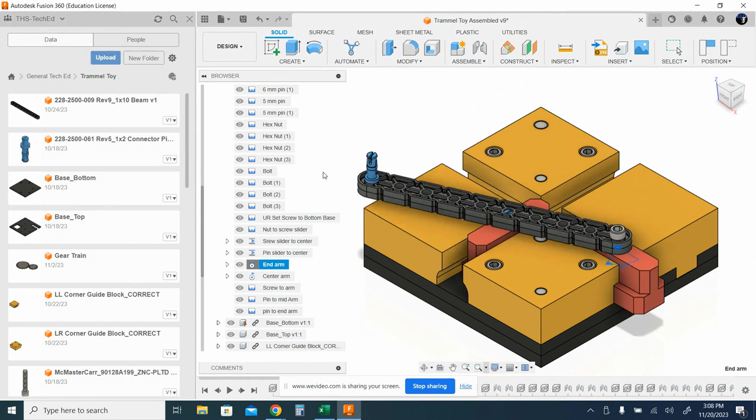All right, hello IED. In this two videos, what we're going to be doing is creating the Archimedes Trammel toy. I'm giving you all the pieces, and you should have it downloaded here. But our end result is going to look something like this. This is the Archimedes Do Nothing, or Trammel toy.

So let's go ahead and get started on this. First thing we're going to do in this first video is bring parts in. This whole project is about doing joints: as-built joints, creating regular joints, and creating motion joints. We're doing all three in this project. So with that said, let's create a new file.

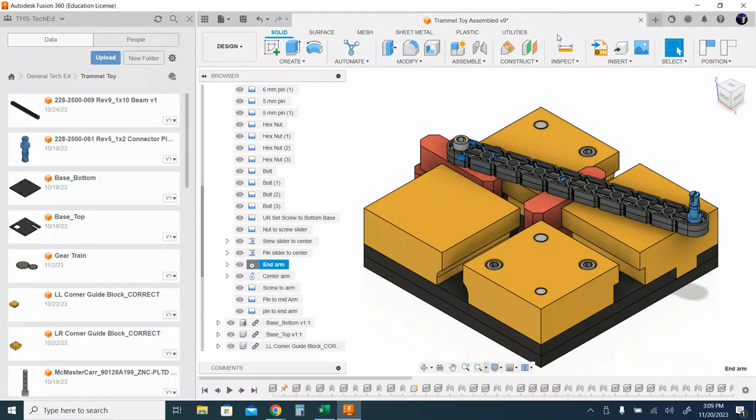First thing we're going to do is save this. I'm going to call this Trammel Toy Video. That'll work. It's going to save it. Upload in progress, thank you. And it looks like we're saving here.

First piece we're going to bring in on the left here is the base bottom. It's going to drop it right in place for me. I'm just going to say okay, I'm happy with its location since it's just somewhere in space. I'm going to right click on base bottom and come up to ground. What this does is lock this piece in place—it cannot move. If I unground it, or take this little pin out, then it will be movable again.

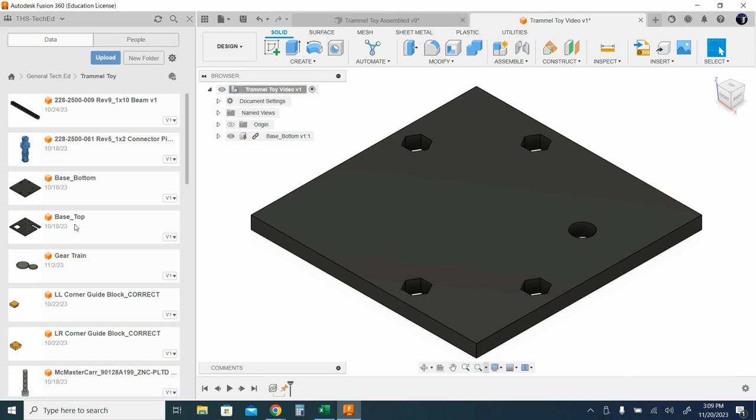With that said, let's go ahead and bring in the base top. When they built this thing, they built these pieces right where they needed to be, which is really nice, because now I don't have to move it. I can say okay, and this piece is sitting here. If I wanted to, I can move this thing around. I'm going to Control Z that, put it back in place, because I want to lock this thing right where it sits.

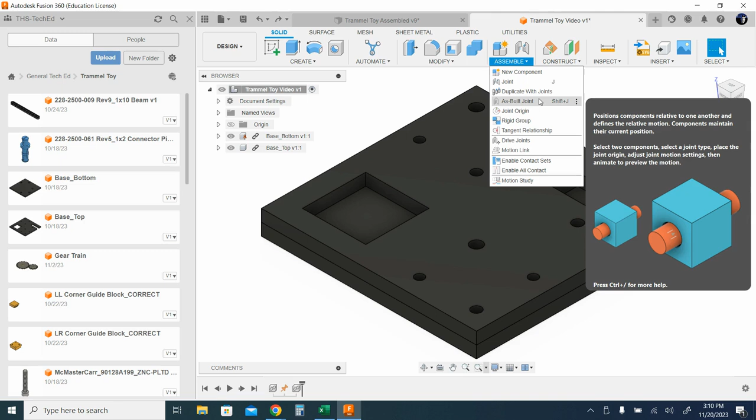To do that, under Assemble, you want to do an as-built joint, or Shift J. It brings up the as-built joint window, and I'm going to select my two components that are sitting exactly how I want them. I'm going to leave my motion as rigid. If you want to see something cool, hit the play button and bounce it around—kind of fun—and say okay.

At this point, they are now jointed together. The bottom base is grounded, so it cannot move. The top base cannot move because it has that rigid joint to the bottom base, which cannot move. So I'm good to go there.

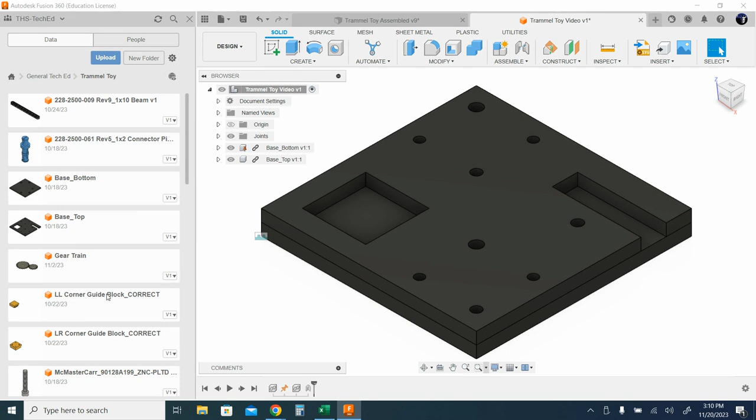Next thing we're going to do is bring in the corners. I have a lower left corner. I'm just going to bring them all in at the moment. Okay, I have a lower right. Scroll down to the bottom—I have an upper left and an upper right. Upper left, okay, and upper right. So those are the four corners that are in there.

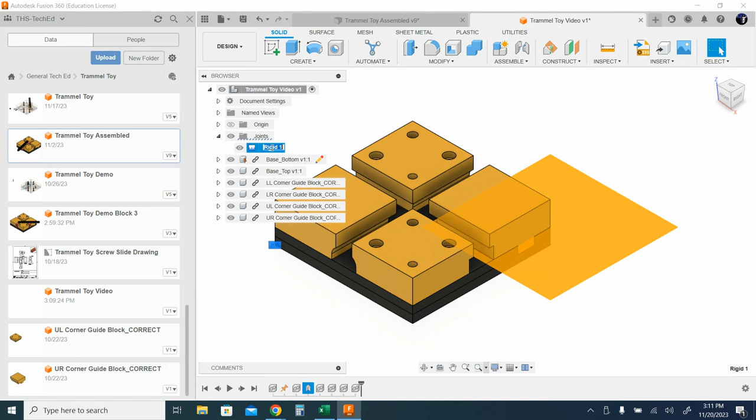Before I get too far, I like to name the joints. So I'm just going to come in here and change my rigid one to 'top base to bottom base.' That'll work. So now that joint is named.

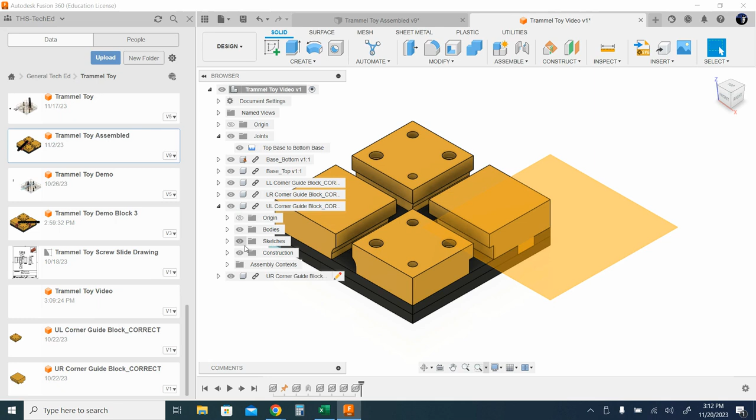And I don't like this big yellow box sitting here, so I'm going to open up each one of these pieces I just brought in and hit the eyeball on construction—you're going to see it getting lighter. That's just getting rid of that construction plane that I can see. So there, construction, and construction. Very good.

So now I have these in. I'm going to go ahead and do my as-built joint again: Assemble, As-Built Joint. This one is my upper right, so I'm going to joint my upper right to my top base, leave it as rigid, say OK. See, now it says rigid 2. I'm just going to change this one to 'UR to TB'—that's upper right to top base. I will understand that.

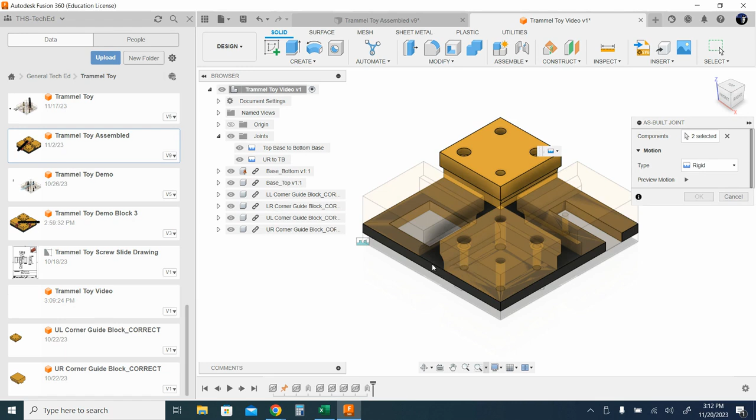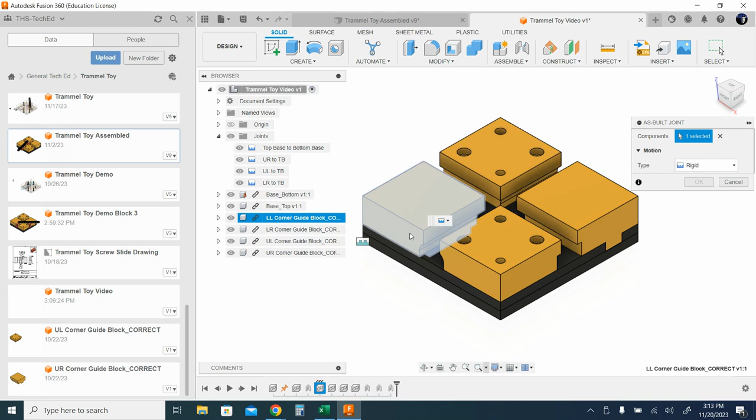Shift J, that's the same thing—the as-built joint. My upper left to the top base, so UL to TB. My lower right, Shift J again, here to there, okay—LR to TB. And my lower left, Shift J, yellow block to the top base, okay, UL to TB. There we go.

And now these are all locked in place. They cannot move because my bottom base is grounded, and each one of these is joined together. So I'm happy with that.

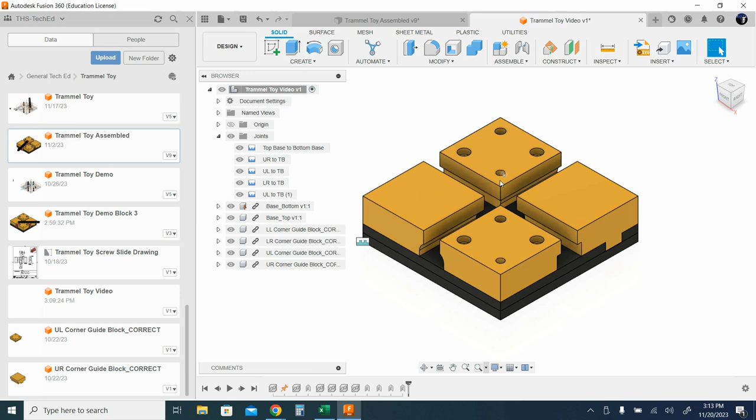Next thing I'm going to do is bring in the hardware, or some of the hardware for this. For that, let's go ahead and create a new component, and I'm going to name this one 'hardware.'

Very good. You're going to see it wireframe down in my image. That's because I've highlighted it on my hardware. And I'm going to bring in this bolt. This is the A199 bolt. I'm happy with where that's at.

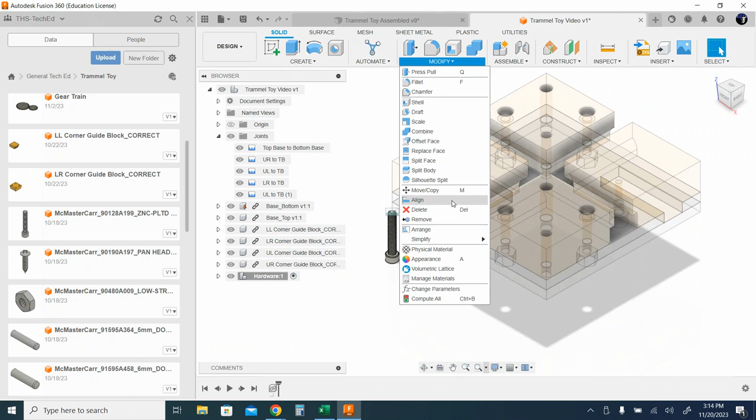Okay, and I now have my one bolt in there. I know for the top of this thing, I am going to need 4 of these. So I'm going to do a modify move, or M key. Make sure my move objects is set to component. Select the bolt, go over here to create copy at the bottom, and then just drag one of the arrows over. Then it'll make a copy of this thing. Do that 2 more times, please.

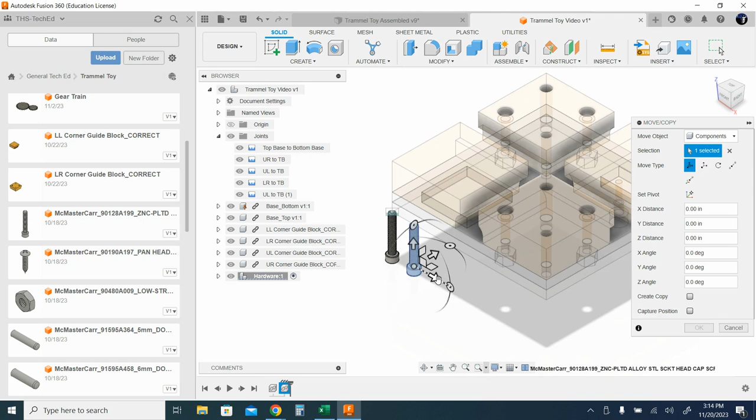There, create copy. Okay, oops, I think I put that right in the same spot. One more time, move, get my component, create copy, bring it out. There we go. All right.

I have those. Let me go ahead, since I'm already on this window, I'm going to bring in the nuts as well. So I'll drag one of those in. See where it puts it. A little high. I'm going to bring it out here, make my life easier. All right.

Say OK. Again, I'm going to move component. Let's select this component, create a copy. I think I'll move this one this way. Say OK. Move. Select the nut, create copy.

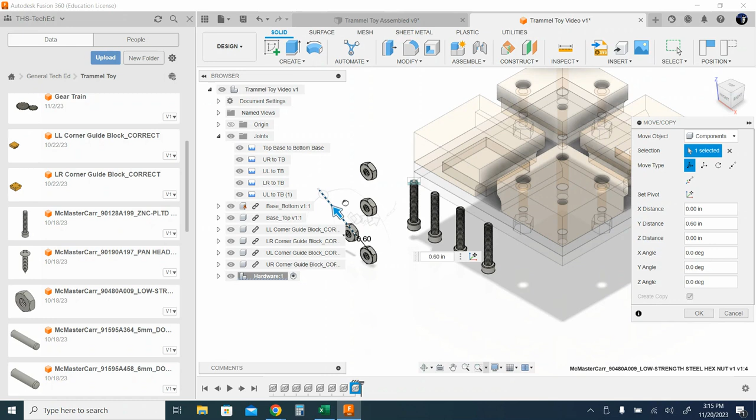Again, to get to the move command, all I'm doing is pressing M. And M one more time to get a 4th one of these. Create copy. There we go. So I now have the 4 bolts and I have the 4 nuts that are in here that I can now use.

Something else you're going to notice: where it says hardware here, instead of having the cube, I now have these multiple cubes. What that's telling me is it's not a single component, but it is a component set, so there's multiple components sitting inside here. When I go to make a schedule or a list of parts, they will then all be added up, since I used the move command as opposed to dragging a new one in from the left side browser every time.

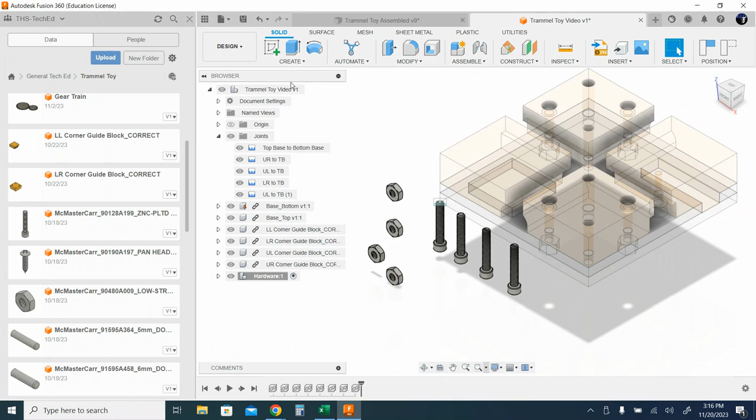All right, so with that said, let's go ahead and put my focus back on my main part and create regular joints, regular rigid joints. So I'm going to go up here to the joint, it looks like a hinge. If you go under assemble, it's the second one there. It says joint, or J.

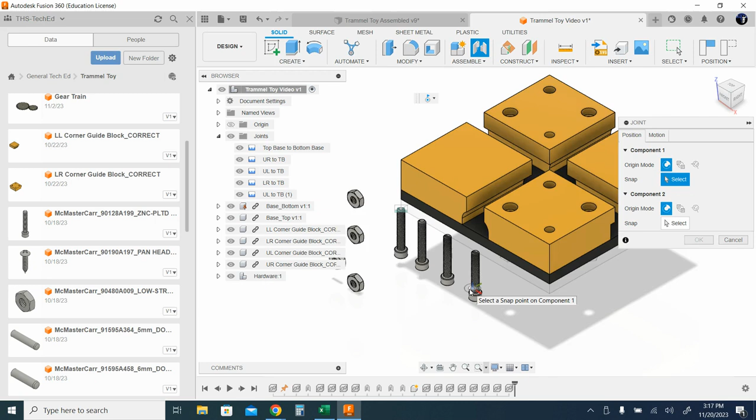All right, to put these things in place, I'm going to be adjusting for 3 degrees of freedom: up and down, left and right, in and out. Fusion wants to do this all in one shot, so the direction in which you go at your piece actually matters. If you go at it upside down, you have to flip it. If you're off to a side, you have to then move things around. So really keep an eye on the direction in which you're going at this.

Your component 1 is always what you're moving. The component 2 is where you're moving it to. So I'm going to move this first bolt here. I'm going to get on this face because I want this face right here touching the face of the countersink, so that my bolt looks like it's completely dropped into the hole as far as it'll be able to go.

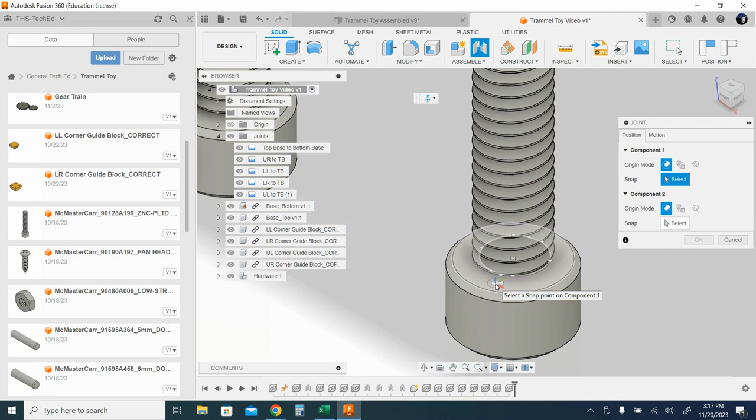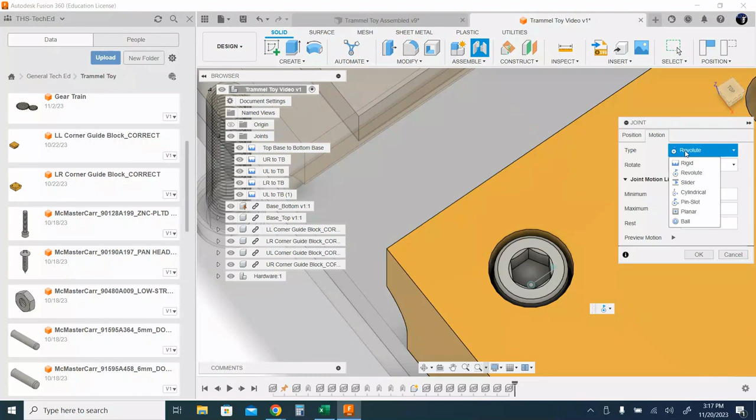So with my mouse over top of this plane, I'm going to hold down Control, get to the center dot. It's going to wireframe out. Then I can come in here, find that lower part of that countersink, hold down Control, and get the center dot. You can see it flipped it for me. Mine's rotating, which means my motion needs to be rigid. There, now it's shaking. This thing is locked in place. I'm happy.

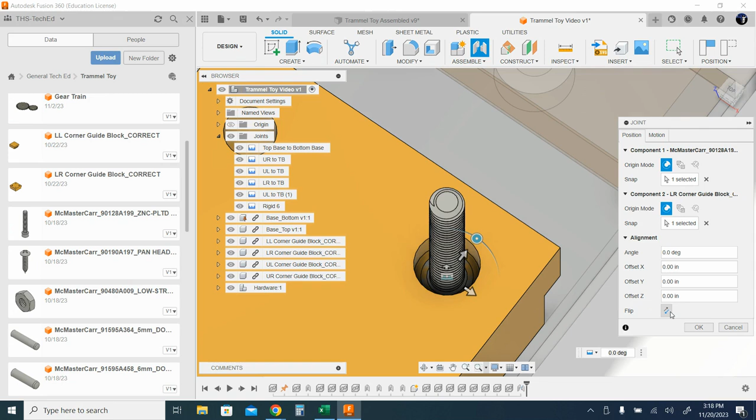Very good, so I'm going to do this 3 more times. J for joint, hit the face, Control, dot. Come over here, zoom in, lower face, Control, click on the dot. It's going to flip it for me. I'm happy. If yours is sitting upright like this, then you probably want it from the same direction, or your flip needs to be flipped. You just do that by right down here on the bottom in the joint panel, click that spot that says flip.

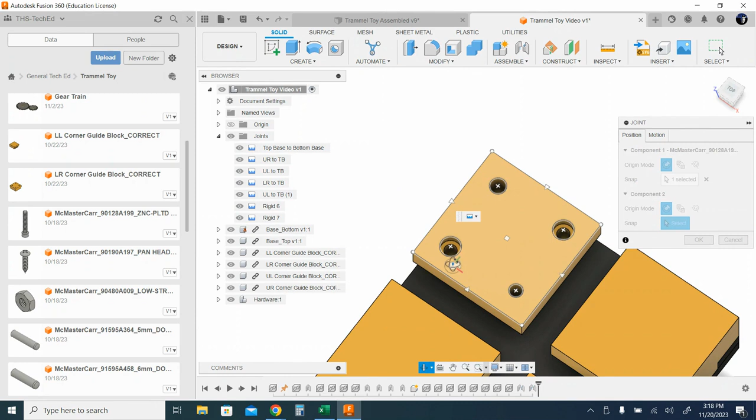So I'll say okay. A couple other things, so you know how I'm bouncing around so easily on this: J for joint, top of this, hold down control, hit the center spot. Using the mouse wheel to zoom up and down, pressing the mouse wheel in, I can drag around, zoom back in a little bit. And then if I want to orbit, I hold down the shift key, and while holding the shift key down, I can then hold the middle mouse button down and orbit around. All right, so back to here, control, click. That's where I want it, okay.

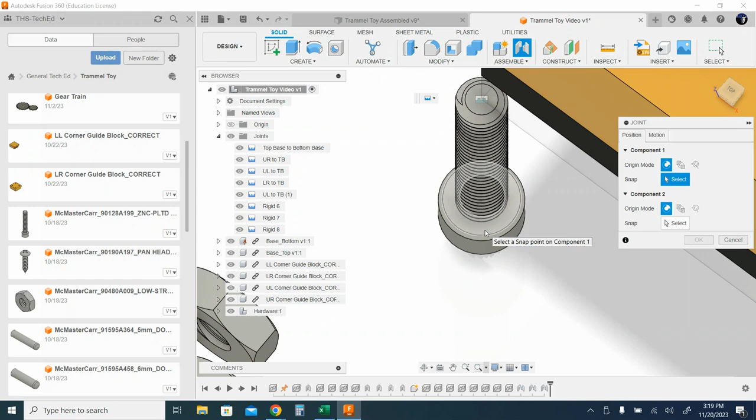The last one. J for joint, get on that face, hold down control, center spot. There we go. So those are all in place. Let's go ahead and put the nuts in place.

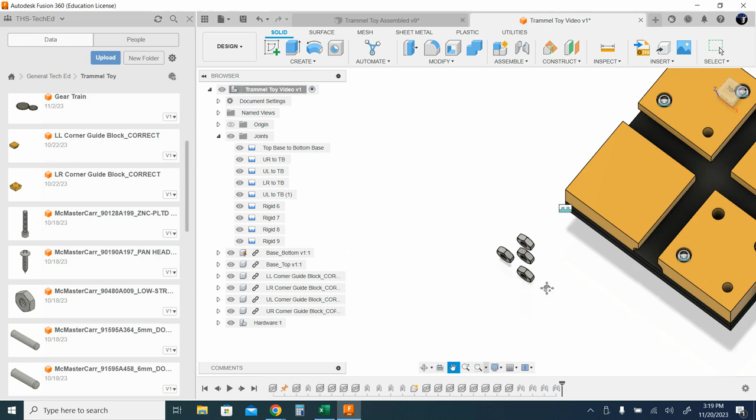You're going to see again, these are rigid here. I really should have gone through and named these things. This one here is my rigid 6. When I clicked it, I can see it's right here. So I'm going to name these real quick before I get too far out.

This is my lower right bottom screw to lower right. There you go.

This one here is my upper right, or lower right top screw, to lower right.

This one here is my upper left bottom screw to upper left.

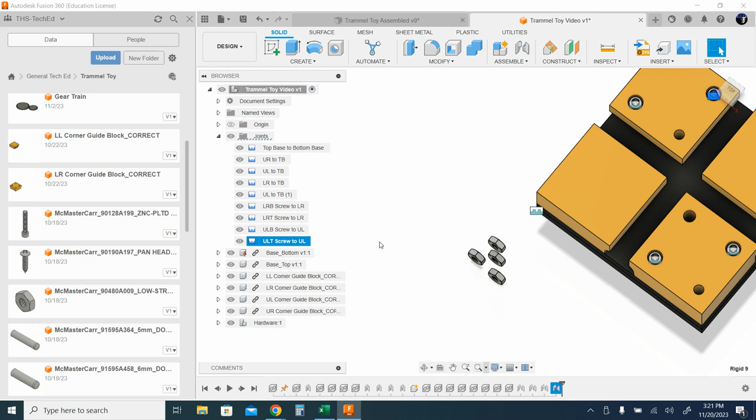And this one is my upper left top screw to upper left. There we go. And it's up to you how you want to name these things. This just makes sense to me, so I'm happy with that.

All right, so let's go ahead and put these nuts in. I'm going to hit J, get on the face of this one because I want these in the countersinks. Hold down control, hit that center spot. Get to the bottom - these are my countersink holes.

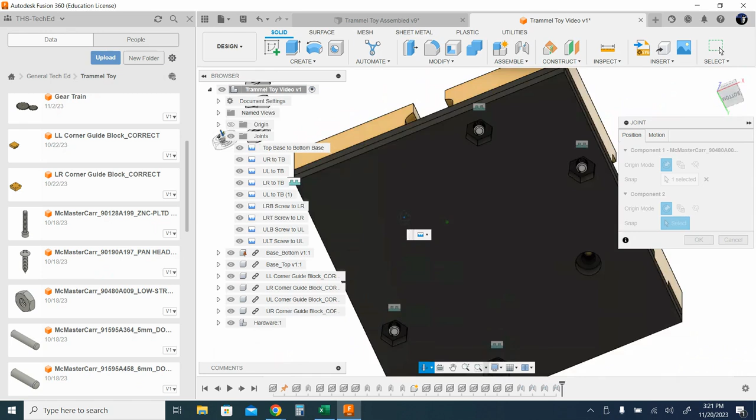Get over top of the lower part where the countersink is. Hold down control, center spot. You're going to see this thing does not line up really nice, it's slightly off. So just take the dot here and rotate it. I like that. Cool, say okay.

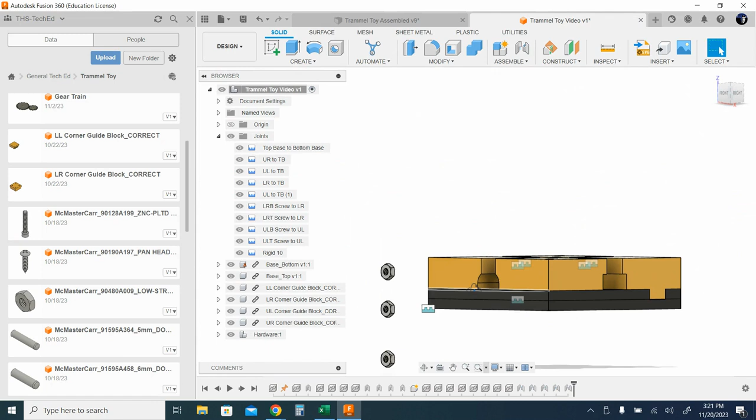And do the others. So J for joint, face, control, dot. This one, face, control, dot. Rotate it in place, say okay.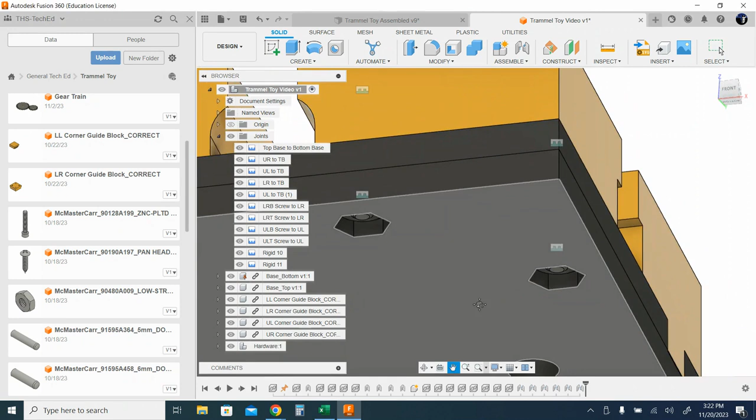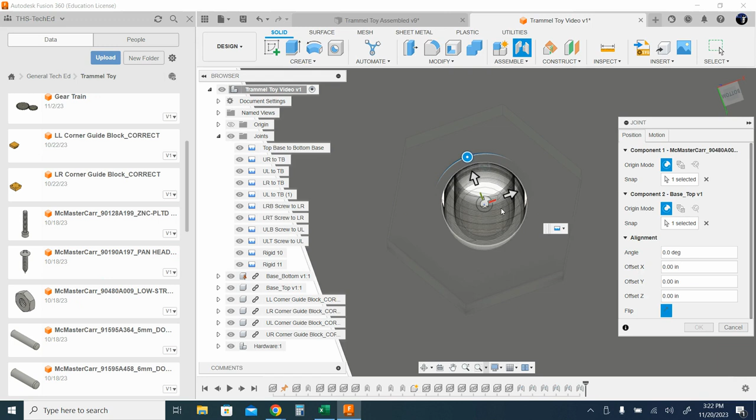J for joint, face, control, center dot. Where are we at? Here we are. Face, control, center dot. Rotate in place.

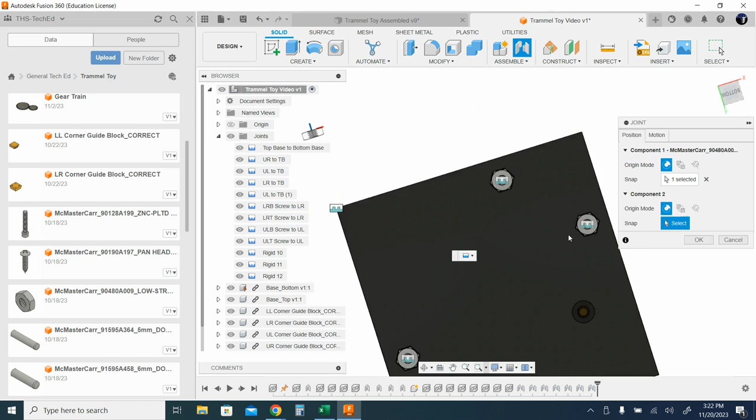And then J again for joint, top, center dot. And there it is. Face, control, center dot. Rotate that in place.

Okay, at this point I now have the yellow blocks exactly where I want. Nothing is moving. I'll go back through and rename those things in a bit here, but I now have all the yellow blocks with the screws, bolts, and top and bottom base linked in.

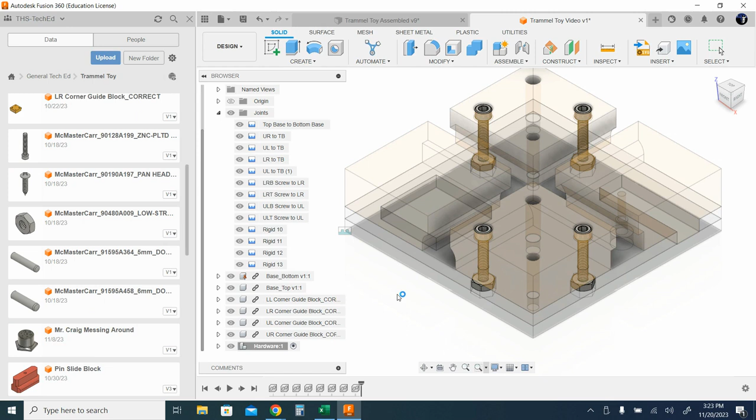So only thing left to do before we start putting in our motion joints is to put in our 2 pins. So I'm going to come back to my hardware, highlight it so I can see it. I'm going to bring in a 5mm. There we go, that's a good spot.

Press M for move, make a copy of this thing, component, create a copy, arrow it out. Okay, and I'll bring my 6mm in, just to have a little bit wider diameter. Let's get this one down here.

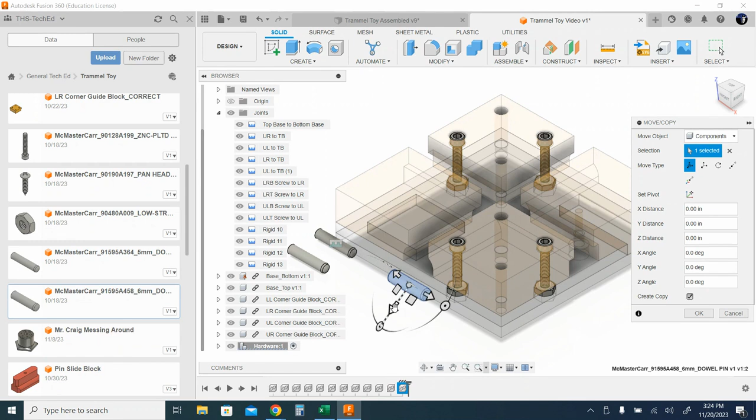Very good. M for move, select the component, create a copy, and get it out of the way. There we go.

All right, so I'm going to come back up to my main part here. Dot. And we're going to put these pegs in, and that'll be the end of this video.

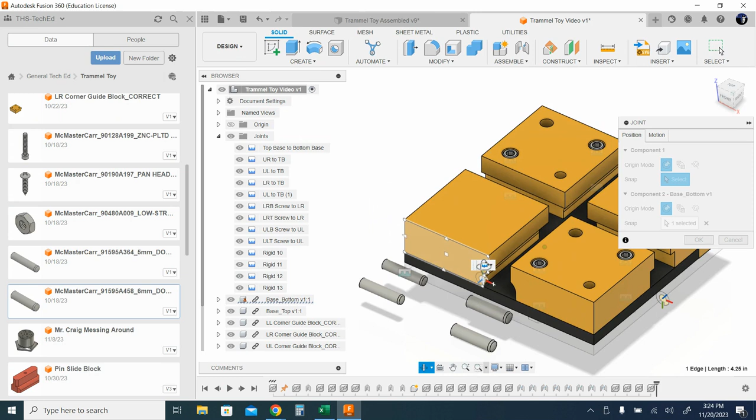So, real quick, joint, J for joint. We'll start with our 5mm. I'm going to get this top face that's not beveled, get on there, hold down Control. Oops, there it is. Hold down Control, get that center spot. Find the smaller of the 2 holes, which is this.

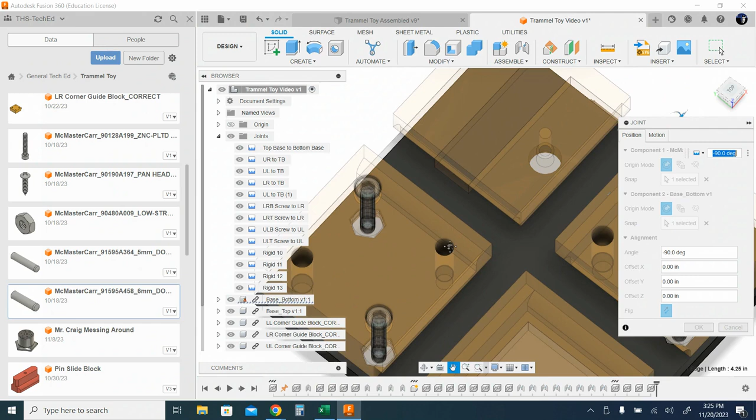Something's off here, let's try again. On the face, hold down Control, dot. Smaller of the 2 holes, hold down Control, dot. You're just going to be standing up like this to flip it over.

Just come over here to the joint panel, click flip. That's good, rigid joint, that's what I want. And I'll say OK. And I'm going to do this for the other 5mm hole and then the 2 6mm holes.

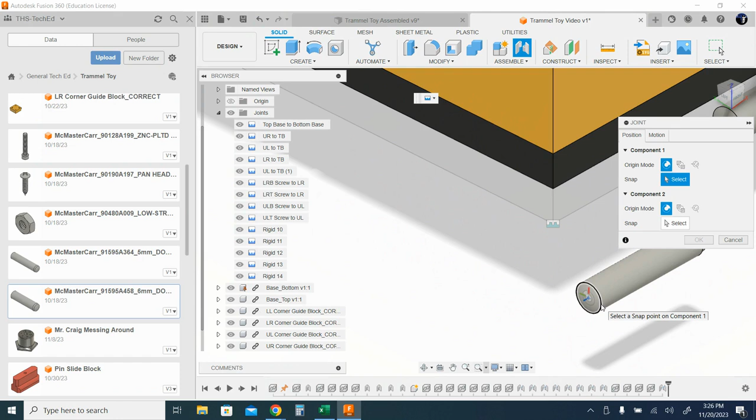J for joint, get that edge, Control, hit the dot. On the face, Control, hit the dot. Flip it over, there we go.

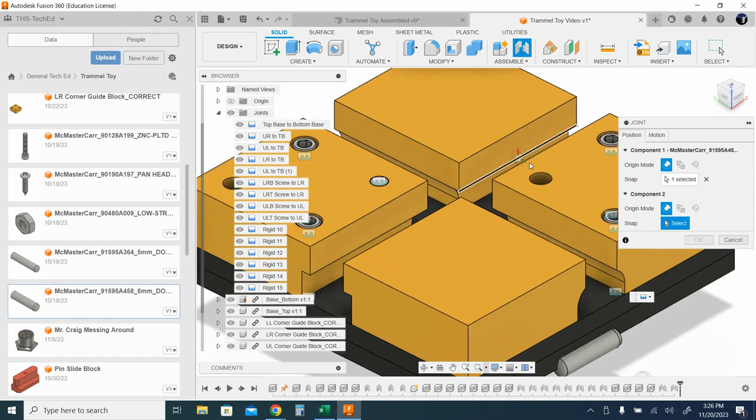And then my 6mm ones. J for joint, get the top one, Control, get the joint or the center dot. On the face, dot. Flip this thing in. Okay.

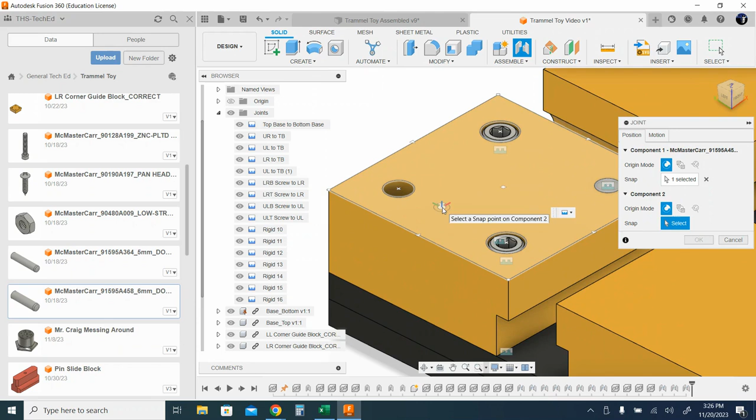And one more time, J for joint. Top, Control, hit that dot. And then on the face here, Control, hit that dot. And flip.

All right, and that's getting me to where I want to end this video. What we have on here is as-built - we have the 2 as-built joints of the top base and the bottom base, we have the 4 as-built joints for the 4 corners. We have regular rigid joints for the 4 bolts, regular rigid joints for the 4 nuts, and then we have them also for the 2 5mm and 2 6mm pins. So this thing is jointed up.

The next video we go right into motion joints. Have any questions? Please let me know.